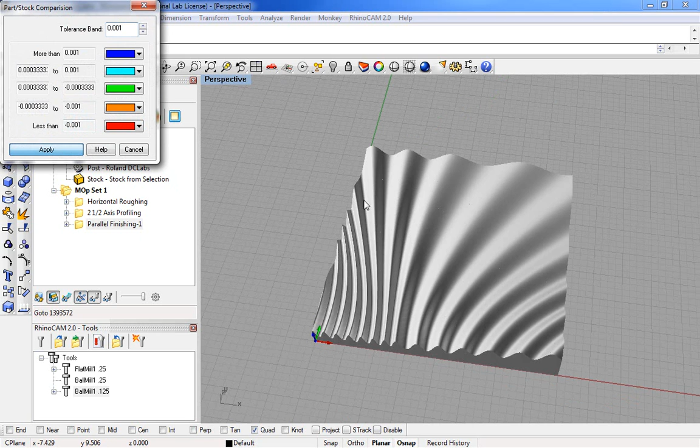Looks like we have what we need. You'll also notice that things move really slowly when you're in the simulation perspective. So if you go back into create, now we're just dealing with the surface and not the calculated stock, which definitely helps things.

So once you have everything set, you could take a look at the information globally for the whole thing, and this will show you each operation line by line. It'll show you the feed rate that you have set. Unfortunately, it doesn't show you the spindle speed, but I don't think there's a way to show that either. But it does show you in total the machine time that it'll take.

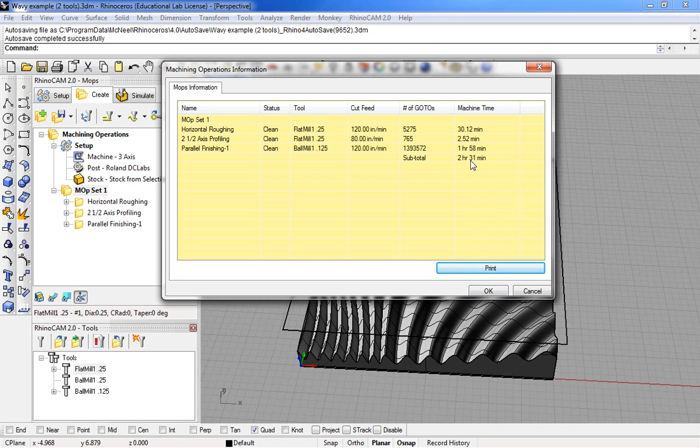Keep in mind these are best case scenario numbers, so typically this doesn't account for acceleration and deceleration in the machine, and so I would probably add at least 25% to this time. So this would probably take anywhere from 3 to 4 hours to machine in the end.

So as far as creating the G code for this, if you go to the DC Labs website, dclabs.wikispaces.asu, and you go under RhinoCAM resources, there is a file right here which you can download and place on the computer that you're using under the following address right here. And once you've done that, you will find that option when you go to post your G code.

Now there's a couple different ways that you can create the G code. In theory, you can just select the MOP, the machining operation set, and right click and then hit post. The problem with that is that it's going to create G code that includes all three of these, and there's no gap in between them. There's no pause because our machine doesn't recognize a pause. So that's not going to work because we need to have a tool change in between this and this.

So really what you need to do is export each one of these individually. So I'm going to post, and maybe I'll just post it in here. I'm going to maybe give this the name of whatever operation I'm doing. So...

Horizontal, rough. Usually what I do at this point, I know how many operations I have, so I'll actually specify that in the name, so 1 of 3, and I might also type in the size of the tool, in this case 0.25 flat.

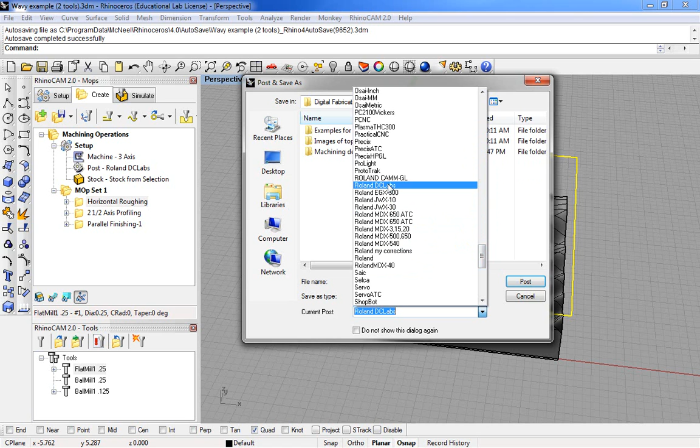Now as far as the post, you can see that there's literally probably a couple hundred posts that we can choose from. You should find the one that says DC Labs that you've downloaded and installed, and you hit post, and that will create the post for you, and it opens up in Notepad, and that's literally what the post looks like. This is what the G code looks like.

So this is where it's telling the controller things like the spindle speed, for instance, 12,000 RPM. If you look for, let's see here, F, right here is your feed, and you'll see that there's different F's throughout the code as it's doing its different movements. These are all just movements that it's doing.

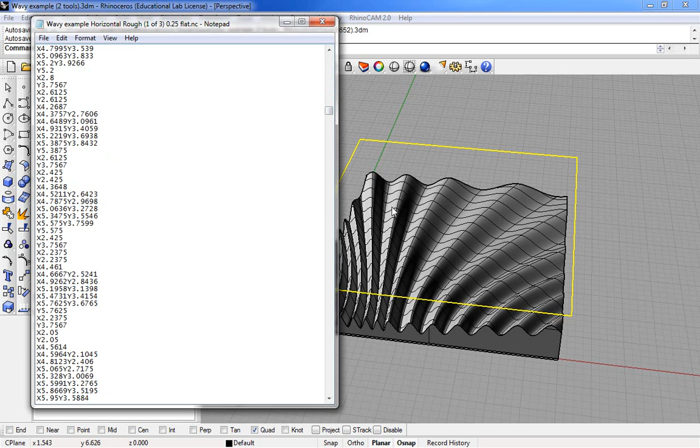So as you cycle through here, you can see that in some cases you have an X and a Y on the same line. In other cases you just have an X when it's maybe just moving in one direction from one point to another. But that's basically it. So you'll post all the operations you have separately, and then just sort of keep them together, and you'll be able to feed them to the CNC machine that way.